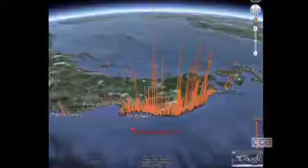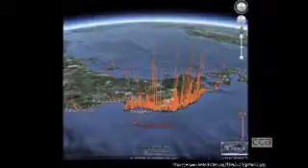This is the height of the tsunami, and here is our site, but it's something like 20 meters, and this one like 40 meters tsunami, it's unbelievable. It's really high, and it destroyed everything. Some 20,000 people died or went missing. So it's really hard, and the Fukushima area is here.

A lot of issues still remain in Tohoku, and nobody should forget this. I just want to show some video.

This is Kesennuma, the second biggest city in Miyagi Prefecture, and there's a big ship here. It is really something like this. In Kesennuma, the worst thing is not only the tsunami, but after that they had fire, so it's all burned. This experience really made some change in me.

This is Kesennuma, and now the ship is being demolished, after like two years. Then we started to think how to respond to this issue.

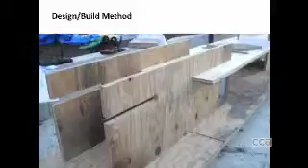In Miyagi Prefecture, I found that Miyagi is a prefecture of trees, and their industry is forestry, and also fishing, and of course other modern industry. But I found that many engineered wood manufacturers were located along the bay because they import wood and export the product. So many companies were devastated by the tsunami.

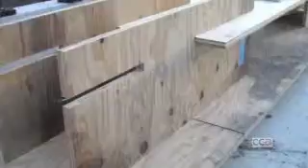Just two months before March 11th, I happened to be there having a meeting with one company to develop some idea about non-flammable wood, this plywood or LVL, laminated veneer lumber. So I started to think about how there are many issues. One is how to promote local industry. Of course fishery is one, but at the same time this engineered wood manufacturer should be revitalized. That's why I contacted them, and they had some leftover plywood.

This dark part is actually where these boards are damaged by the tsunami. So the tsunami damaged the plywood, and it's cheaper, so we could get it.

Then we started to think how to make a building method for the people, not just a professional carpenter, but for regular people to construct the building, because after two or three months, the carpenters are all occupied, and we cannot wait. If you wait, it takes like half a year to get a professional carpenter.

So what we thought is maybe we can create a method with which regular people can construct. Our idea is to have a notch here, and a notch there, and insert something like this. It's the easiest way. And of course this is not my invention—it's like Charles Eames had a card, a playing card, to make a house, a card house. It's amazing, from like the 1950s. So I was very impressed.

And of course for this one I used the CNC router, but the house I would like to show you from now is just cut by hand. So first, encourage local industry and use local wood, and also establish or develop some building method with which people can easily construct. And plywood is actually very cheap, especially this one is very cheap.

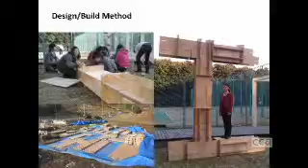So easy, cheap, and local, that's a very important issue for me. So we started to do some experiments with students, and the students are very excited about this.

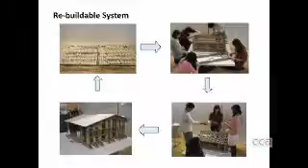We asked the local people to cut by hand, then we started to make a mock-up, a one-to-one model. We thought if the building is used, after that we just assemble and move somewhere else. So not just using glue, but we used screws so it's possible to disassemble. So this way, but also this way is possible.

That's the strategy. And then we got a client - a guy about 28 years old who voluntarily moved to this area and would like to have a community space for the people. So we just worked together, and these are all students.

This is in the middle of January, February, the coldest time in Tohoku. We went by night bus on weekends, worked two days and came back by bus. It's a tough time, but students are really excited because they could join the event, helping people get a sort of peaceful place to gather.

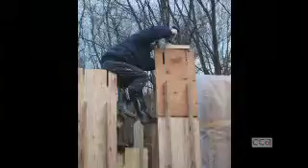At this time, temporary housing was pretty much done, but they didn't have a community space. So we thought that a community house built using local wood and local plywood would be good. This first experiment is about 1,000 square feet, and the guys are working like this.

It's very tough - maybe he doesn't feel this, here, and this is the coldest time. It took like 4 months, but half of the time basically stopped like this.

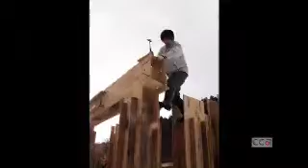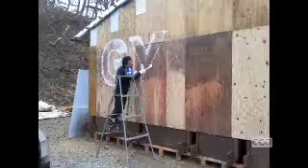So for about 2 months it took to construct. It's quite fast, but very dangerous sometimes without a helmet - I should have just told them to use a helmet. The safest part, I did - just painted. It's the safest one. I'm the oldest.

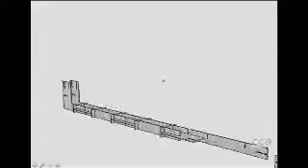I'm sorry, oh, this one is a movie. Just so you can see how the building is constructed - basically we use a 1.8 meter unit, like a 6 feet by 3 feet board, the most popular plywood in Japan. That's why we connected 1, 2, 3, and 4 boards to make a beam, and the length is 7.2 meters wide.

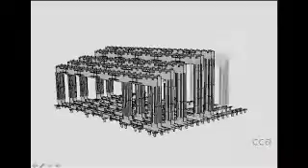Actually it was too wide, that's why it bent later. But then we put this beam - we had to use some machine to put the beam. We originally thought we could just build by hand, so we don't need any big machine, but eventually we found that we needed one.

Then we put all the structure here - it took something like a month to construct this. Then we put the roof and floor and some substructure for the wall. But in this area, as I told you, it's very cold.

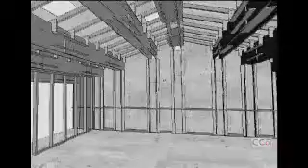That's why we had to put insulation, and then another board - so it's a double layer, and it took some time to finish this. This great thing is insulation, right? And then we have a skylight here, to get some light.

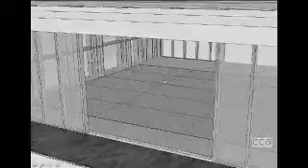Then we put the tatami mat here because people can sit on the floor - that's the beauty of Japanese building. We used bigger plywood to have a door, like 3 layers, and put polycarbonate transparent stuff here. Then we put the terrace and bench, and basically we've done.

This is the last day. Students are exhausted.

The interior is like this, and we put some cloth here for a sort of indirect light. This is because some local people came and said they didn't want to see this dirty board because it was damaged by the tsunami. I thought it was a wonderful idea to use that kind of wood, that kind of board, but they didn't want to see it. So we covered it, but instead we have indirect light, something like this.

And then they started to use this, and these substructures become a shelf - I mean a bookshelf, with a lot of manga and cartoons. I like this, it's more very Japanese. Now eventually, finally, it became very Japanese. And another very Japanese style - smiling.

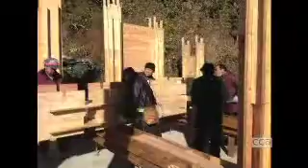These are our staff, discussing the details.

Then we decided to send one supervisor, but not students or staff, to construct. This time we asked the local fishermen to construct. So these are all fishermen.

They worked very hard because they usually went to sea around 3 o'clock in the morning and came back around noon. After that, they just have lunch and then start work until 5, so like 4 hours, then go back and sleep. They work very hard, and their teamwork is wonderful, because on a ship they work together. So they don't talk much, but they work very hard and can really collaborate with each other.

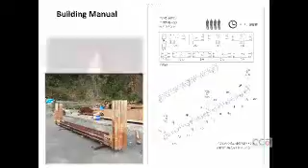But instead, we learned from the previous project that we need something more like showing the detail and order, so we made a manual like this. This afternoon we have 1.5 hours, 4 people can construct this. These are the number of the kinds, and we put the numbers B1, B2, and assemble like this, and make this. This is the result. So even without a supervisor, they can just work with this manual.

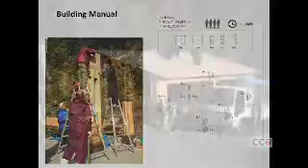So this is sort of a new invention for me. It's like IKEA furniture. We just did the construction manual, and they are constructing, right? So it's smiling, and then they said it's like a plastic model. It's easy, right? And I felt very nice.

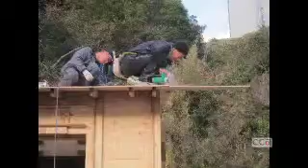Then they worked very hard on the roof, and I just felt it's very dangerous. It's quite steep, right? But it's easy for them. Usually they just walk on the ship, sleepily moving, so this is stable. It's easy for them.

So they worked very hard, and this is the head of the team, but he did everything by cutting by himself, and he doesn't talk a lot. He didn't talk a lot, but he actually worked very hard, and everybody just followed him.

Really fantastic experience. Then finally, March 24th this year, the building was completed. This part is a storage, and this part is a meeting room. The finish is polycarbonated, transparent, corrugated panel, and the structure is visible. I just wanted to show the structure, because the structure is the most beautiful part. Then this is the interior.

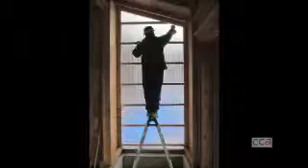I'm sorry, color-wise, this color is more vivid, but this one is a little bit brownish or greenish. But anyway, we have some lights coming in here, and tatami mats. And we use LVL, laminated veneer lumber, which is sliced - not just the surface of this part, but the piles of boards then sliced. Then you can have a beautiful pattern.

This guy, Mr. Watanabe, on the last day, the cleaning day, tried to clean even the corners which are hidden. He used chopsticks rolled with a handkerchief to clean up the corner. I was very touched because he himself, or this building, already belonged to him. This is the moment I found that really participating in the event is the important thing. That's the very important thing.

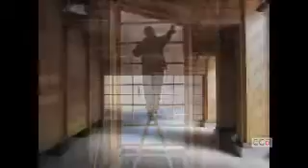They started to love this building, of course, and tried to maintain it well. At the same time, they constructed it, so they know what part is weak and what part is strong. They know how to repair the building, so it's very important. This is the storage part, and they put the God here.

This is also very important, and this guy is Ultraman. Japanese animation, Ultraman is very important. This guy is a 7th or 8th generation, called the Returning Ultraman. They came back from somewhere, but this guy was gone on March 11th. A year later, he came back to the beach, and really, he returned. A little bit scary, but they love this guy, so they put this god here. So there are 2 gods here.

This is the tatami mat, and this is the flooring, and of course it's all exposed. Some people say this is ugly - this is plywood, right? But at the same time, if you make this building, you don't feel so. Oh, this is beautiful. So please just judge - you think it is ugly or it's beautiful.

This is the view from the gathering space to the ocean, so the ocean is very close. Of course, there is a question. We built a building where the former building was just drawn, gone. Is it right or not? Some people say, oh, don't build anything here, it's dangerous, right? But some other people say, okay, if something happens, we can just escape.

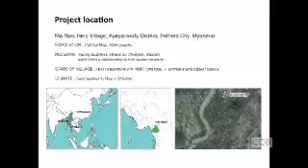Here's Yangon, the biggest city, but here's Pathein, our location. The site is located in Pathein, about 5 hours drive from Yangon, and it's not a smooth road, it's tough to get there. Our colleague at a university introduced me to the local people, and we found that in Pathein there is a village with something like 1,000 people living, and 250 families.

The situation is something like this: the rainy season, something like 3-4 months a year, is very heavy rain, so it's all just drowned like this. It's very tough in terms of sanitary conditions, and very difficult for them to live in this situation. We did some research in the rainy season, in September. This type of house usually has one family, like 3 generations living together, something like 6 or 7 people living in this situation.

We started to draw first a map of the village. We checked every single family, every single house, took photos, and made this map. It's quite a beautiful grid pattern, because it was made some years ago when a big number of people moved from the south to this place after they got hit by a hurricane one year, and then a big drought the next year. So they gave up farming there, the village moved up and started to live in this area. The government decided, okay, you guys live here, drew the line and gave some plots. But basically they built the houses by themselves.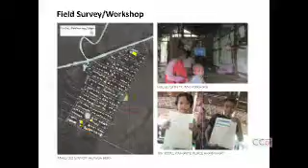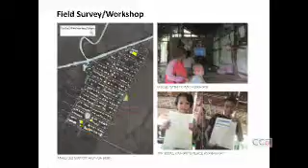So the situation is very tough. We did some workshops with kids, and we asked them what kind of house they want to have or want to live in. This kid drew this, and this kid drew that - I'm sorry, you can't really recognize it, there's some flower or a house, but still, and also smiles, you know. So that's why, okay, you have a dream. It's good. And there are many kids there.

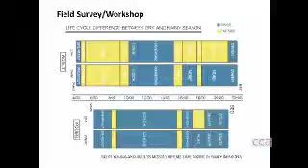I did some survey about the dry season and the rainy season. Adults, in the dry season, work in the morning and afternoon, even at night, as farmers. But in the rainy season, in the morning they usually work, but in the afternoon or evening they do not work, because it usually rains hard. At the same time, kids in the dry season can just play - first they go to school in the morning, but then they can play outside. But at night in the rainy season they cannot play because of the rain. So we found that this is a serious problem happening.

Domestic violence happens in the home because it's a very tight, small house. They live together and cannot get out. Even if they scream, nobody can hear because it's pouring rain. So we found that maybe we need some place where people, or kids, can escape, at least this season, this time.

So we discussed with the local YMCA, and then we decided to build a learning center for kids.

Also, a doctors' team comes once a year from Japan to this village to take care of the kids and treat disease. So it would be quite good if we have that kind of space.

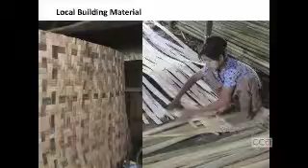So we did some research about local material, and this is bamboo. These ladies don't use any gloves, which is amazing, and they handle a lot of sticks. It's very dangerous, but they can handle it.

This is really amazing, a local product. You can make big sheets of bamboo, and it's actually durable, something like 8 to 10 years. You can use it as an exterior wall.

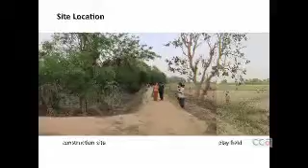So we started to think about the site, and finally we got this site. It's fantastic because it's located in front of the playground where the kids play soccer and many other things. Of course it's just a field, but they play here. So we found a fantastic place just in front of this field, sent money, and the YMCA bought the land.

Then we designed the house and made a 1 to 10 scale model. Sorry, that's the metric system, but 1 to 10 is the scale, I think. Then we pre-cut the pieces, and I instructed the guys on how to construct the building.

Then they enjoyed making something, and they were actually excited about having this tool, like it's a play activity. Many kids were really involved in making things.

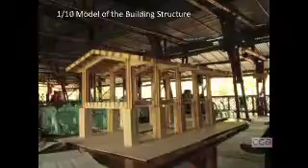We had a foundation here, raised 2 meters high, because flooding comes every year. So it's raised, and this is the structure part. The boards were bought in Yangon.

Our friend cut them by hand and carried them to this place by truck. But afterward we found that even in Pathein we could get cheaper boards, so I think maybe we can ask somebody, or do it ourselves by cutting the boards.

Unfortunately, this village didn't have electricity yet, so we couldn't use an electrical machine. We basically just used a hammer and sawed by hand. But the pre-cut pieces were pretty good, so we didn't spend much time amending pieces.

It's really good. From the next day... sorry, these are the drawings, which we drew later. This is about 60 square meters, like 600 square feet.

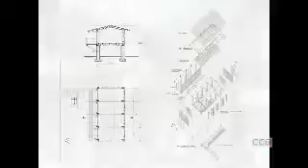We basically decided to use all boards, not the LVL, because it's a panel and it's easy to get. So from the next day, the kids really helped us construct. They were like 12 years old and 11 years old, and they were very serious about constructing. They know how to construct because this is 10 times as big as their model.

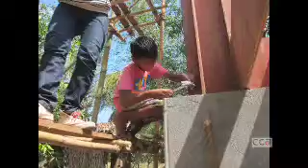So they're really excited, just asking okay, what to do next. And some guy was just hammering like this, and he did better than I did. Really, he just said his father always told him how to do it. So he already got a good education from his father.

He is a structural engineer from Japan, working as a worker here. And these are all students. This is the first beam we put up. This time we actually used an 8-foot board. It's a longer one, much more popular in Myanmar and also in the States.

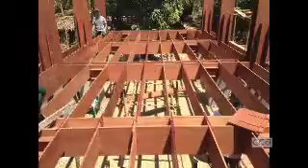In Japan we usually use 3 by 6 feet boards. But other than Japan, we usually use a 4 by 8 board. Then we put some structure for the floor.

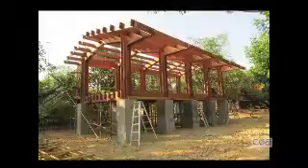This is a week later after we started. This foundation was done - I came before and constructed it with the local contractor. But after that, we started to construct this in a week.

So it's quite fast. This time we decided to repeat the same system here: 1, 2, 3, 4, 5. So the number of kinds of board is 50. This one is 48. But the one before, the Venue House 2, was 50-something, 1 or 2. And the first one was more than 100.

We made many mistakes on the first one, because it's very similar but different. So we tried to minimize the number of boards. This one: the main structure is 21, and the substructure is 27. So we still have to develop more to decrease the number.

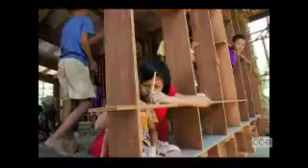It's a happy moment, and already some attachment forming - these are our students. These are local girls, my students, and local girls - it's a very close relationship. It's very nice.

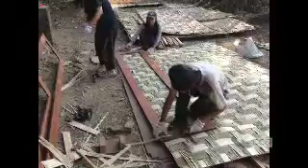Oh, she started to study already, even before the completion of the learning center. But the boys just play. That's the structure - so the ladies are very, very hard workers.

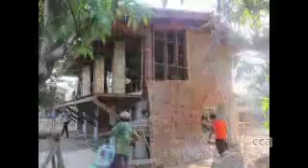Then we started to make the doors, and we put in the windows. Then finally we put the exterior wall - this is bamboo mesh, bamboo board and sheet. And we don't need any insulation, that's why it's much faster.

Our students were excited about making windows. This is the last day - it's completion. So finally we completed this building within 3 weeks.

So it's very fast. During those 3 weeks, the students were basically stuck at this place - they couldn't escape, so they worked very hard from the morning to the evening.

This is a happy moment - she visited the site many, many times. I really feel that she thinks this building is hers - that's very important. This window is mine, she'd say. This is a very low window here, for kids and for adults, and for ventilation.

So we made many, many windows. Here are the doors, and then the terrace. Because water comes up here, we made a bridge to the street, so kids can come this way anytime.

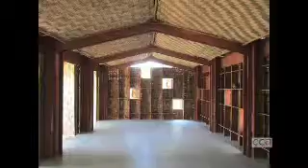For the interior, we put bamboo mesh again as a ceiling, because it's very hot - we put the tin roof and it gets very, very hot. So we kept some distance between the ceiling and the roof, with some ventilation. This opening is always open.

These are the windows - a lot of windows, to get light and also to get wind. You can see some gaps. It's nice to have wind, but in the rainy season you get very heavy rain, so you need some sort of exterior wall.

On the final day, they kindly set up a ceremony for us and for the kids. Over 50 kids gathered, and they just thought, okay, this is our place. It's an important moment, because now they have a place where they can study and play.

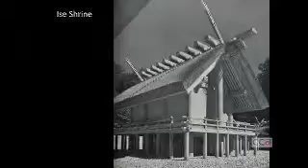So I'll change the topic a little bit. This is Ise Shrine, one of the oldest shrines in Japan. This year is a very important year because every 20 years they rebuild it, and it's replaced by a new one.

That means this was built at some moment, for example, like this year, and then 20 years later this will be demolished. But then the new one is built next to it. So this is 20 years old, and this is brand new. Every 20 years they replace it with a new one, and a new one, and a new one. And it continues for 1,300 years.

The reason is a mystery, but we studied about this when I was a student. The reason is to convey the tectonics of the building of that time to the present day, because every 20 years they did exactly the same thing. So the building itself is new, but the spirits and also the techniques are carried to the next generation.

If you have 20 years, and a usual carpenter lives more than 60 years, then at least twice the carpenters can experience this rebuilding process. So they can really understand what's happening here. This is very Japanese, I feel.

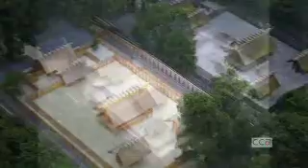Of course, it's a shrine, so it's Shintoism. It's very Japanese, but at the same time, in Japan, the physical entity itself we don't care about so much. More like the spirits or techniques should be conveyed to the next generation. So the building itself is new, but the spirits and the tectonics, the techniques, are very old and conveyed to the next generation.

It's very sustainable. I also found that it's only 20 years because it's very expensive. But after demolishing these buildings, the wood can be used for other buildings in other shrines for another 20 years, then after that, again used for another 20 years. So in total, 60 years, they use one tree. It's a very sustainable system, and I was very surprised.

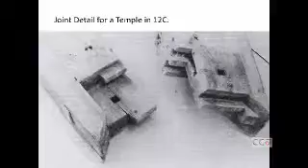Also, there's no nail, no steel nail used, just wood. So we started to think about how they make this kind of stuff. This is the wood joint which Japanese people invented, and this one is from the 12th century - about 900 years ago.

This is a very intricate, complicated detail, like an L-shape joint. They connect this piece, and then finally put in some wedge to connect it. We found that this is a very clever way, and we have a tradition of making joints without any nails or screws. If so, we can really reuse the parts, and we can make better joints.

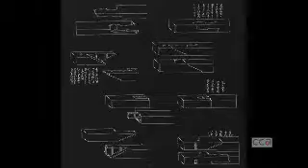For example, like this joint or this joint - this one is from old books. There are many ways to connect this, like a beam. So there are two things: a perpendicular connection and a parallel connection on the same surface.

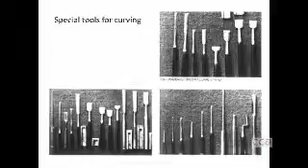I started to think about this, and before that, professional carpenters used these tools. So what's the difference between this and this? We really don't understand why they need this, but at least they use these to carve the joint. Of course, it's wonderful professional work, but we cannot do that.

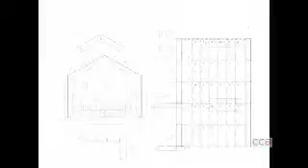So in this case, this one is wrong, I'm sorry, let's go on. But basically there are 1, 2, 3, 4, 5, 6, 7, 8 pieces. So this building is made of 8 pieces, 8 kinds of boards.

And it's very simple, because basically this piece, I think maybe I can show - this piece here, A, and A, and A, and then here, and here. So this shape is made of like 3 kinds of pieces, and then just repeated like 1, 2, 3, 4, 5, 6 times.

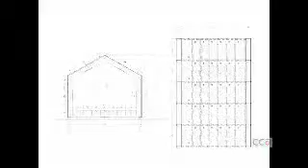This time we decided not to make columns and beams, because although a column and beam structure works pretty well, the column creates a vacant void we cannot use. So we decided to make just a flat structure, connected by the boards. So basically the boards are one kind - floor, ceiling, and wall, one kind. And we tried to cut the boards as effectively as possible, but we still have some leftover.

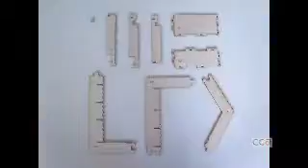So we're now thinking to make some furniture for the house from the leftover. In total, like this piece, 20 to 30 pieces, and this board is like 6 boards. So we just cut it like this, using a laser cutter this time.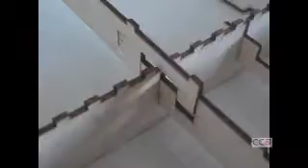And then we started to construct it like this. So this joint should be like this. We use a similar system - notch and insert - here too. Then the amount is like, yeah. And here, another joint is to support the floor, so one piece here and one piece here, integrated like this.

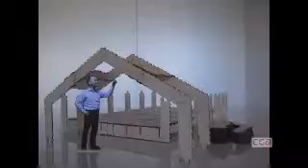Then we put the board, so we don't need any nail to make this stiff. I'm sorry, I mean we're always instructing as we construct. And I put the beam - this is actually lighter, so I think maybe 2 guys can just handle it, like this.

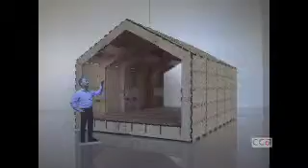Then put the floor here, right? Then finally we put - what's the difference - sorry, okay, support here, right? Because this is the joint, so we put this board to make it fixed. Then we put the board on the wall.

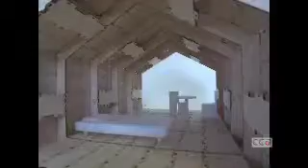So finally, this is basically what we designed for the people in Myanmar. Still, $2,000 is very expensive for them.

But I learned from one housing company in Japan, which invented this type of small house made in steel in 1959. At that time, the house was sold in a department store, about 10 square meters, and nearly $11,000 at that time - very expensive. I was very impressed because in the 1950s, the Japanese company already made that kind of prefabricated house, and it was sold. At that time, just after the war, much land was vacant, and people started to buy the house.

So I would like to make this one and promote this sort of housing for the Myanmar people. But I don't know - these days it's easy to have a CNC router and also engineered wood, because they have concrete buildings, so they have plywood there. Lastly, I'd like to show you some more technologies about wood, which is a non-flammable wood technology.

This was invented by an engineer about 10 years ago, and I worked with them to do some experiments.

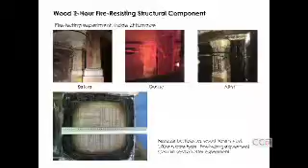And this is the experiment, about a 2-hour fire-resisting test, and it passed. So now we can get a 2-hour fire-rated permission. Then if so, we can have a 14-story wood building in Japan, according to the regulation.

So we did some experiments in Miyagi Prefecture, again in Ishinomaki. This one is just regular plywood, but this one is treated plywood. This one burns within 9 minutes and burns down, and this one takes more than an hour. Some part is just charcoal, charred here, but the second floor, nothing happens.

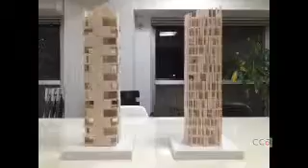So it's really nice technology, and I would like to apply this to houses. If possible, we would like to make this house non-flammable. It's still very expensive, but maybe the price will come down if we use it a lot.

So we decided to design a 14-story building made in wood, like this one or this one. Basically it's a core and shell structure. This is a similar system here.

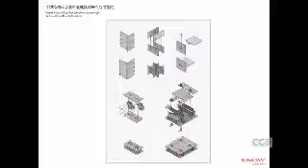It's like a notch system, and then some other joint system we applied. I think maybe it's not so easy, but if we apply this joint system, maybe we can have some new wood buildings, not only just a house, but buildings like this.

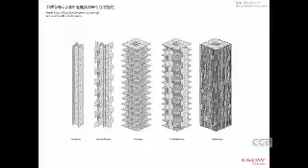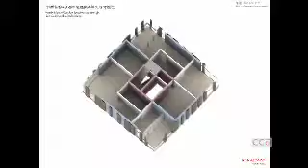So this is the core structure. It's about 200 millimeter thick LVL. And then we make a core, and put some wall, and then floor. This is the core, and we have some structure wall here. So this is the way we designed the plan.

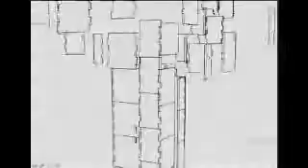Okay, this is a short video of the similar system, and first we make a core.

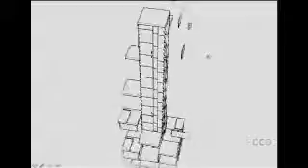As you know, we have the Olympic Games 2020. It's a wonderful thing, but we have to build many, many things. And for the athletes' camp, this type of house is fantastic, if you can build in wood in Japan. So we would like to promote this technology to the government and municipalities in Japan.

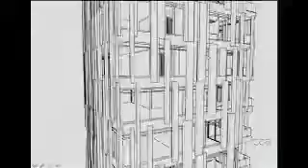And if we can really use a lot of trees, that would be fantastic, because now more than 70% of the area is covered by trees in Japan, but nobody can use it. So in this case, the wood itself is still expensive, but if we can use it as structure, at 200 thick, and also as interior finish, and if you can use this finish as exterior too, maybe it's a little cheaper than a concrete or steel building. Because with a steel building, you have to have many substructures and many finishes, and many different companies come to construct. But this one is basically made in wood.

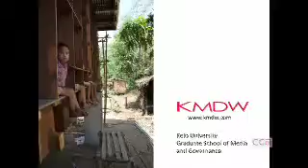Okay, I have to stop my presentation. But I would like to thank you all, because this is a wonderful moment for me to convey our ideas to you. And also, these days, I myself am still thinking about how to make the gap between the building and myself closer. And this way, maybe, is the way to understand how to make it happen. And I would like to ask you to instruct me in any ways, which would be pretty helpful. And that's almost the last word for me. Thank you very much.